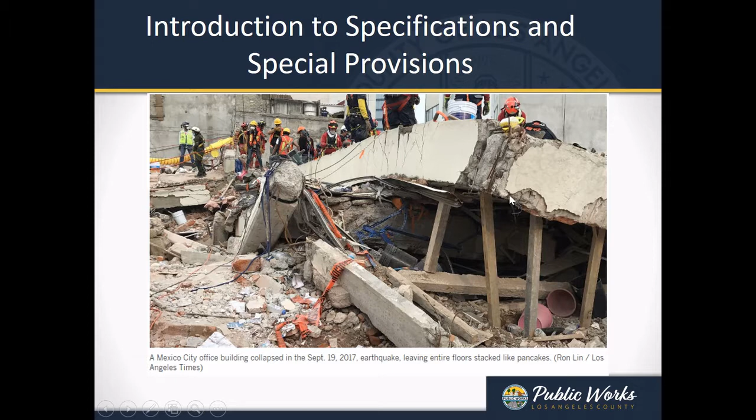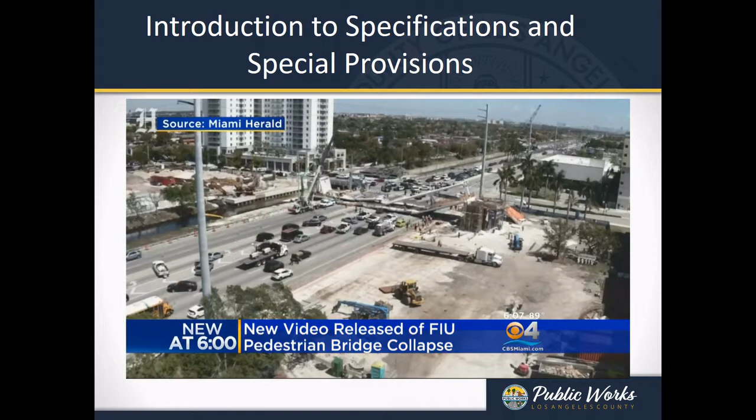All new at 6, we're getting a different, closer look at the FIU pedestrian bridge collapse that killed 6 people back in March. New video from FIU, courtesy of the Miami Herald, shows a time-lapse of the bridge from 3 different angles, composed of photos from different cameras around the university. At one point in the video, you see workers standing on top of the bridge before the collapse. The NTSB is still conducting their investigation into the cause of that collapse.

So 6 people were killed. Other people were injured. Many families' lives were shattered. And lawsuits were filed. I hope you noticed in the video that they had allowed traffic to go under the bridge while construction was going on. If they had had a specification that said close the road while you are working on the bridge, they would have saved some lives.

All new at 6, and we're getting a different, closer look at the FIU.

So let's take a look at the two basic types of construction specifications. The first one is method specifications, and the second is performance specifications. The Green Book is an example that uses method specifications, and Caltrans standard specifications uses performance specifications.

Method specifications are a lot like recipes. You follow the exact materials and steps. Performance specifications are concerned with the final product, and there is a lot of in-place testing.

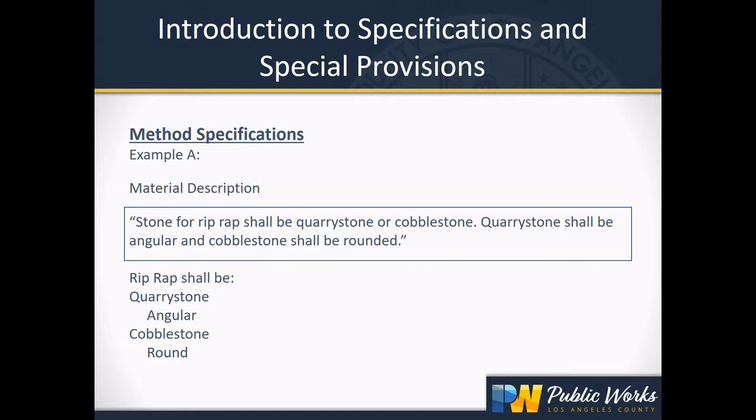So here's an example of a method description. The pavement shall be compacted with 3 passes of the roller.

So, performance specifications. They describe the required result and quality of the final product. They specify required performance of the materials, equipment, and completed construction. It gives the agency the ultimate decision to accept or reject the final product.

Here's an example. This basically says that they will perform a hydrostatic test. The leakage is not to exceed 0.6 gallons per inch. If it does, you stop the leak, fix it, and then repeat the test until the 0.6 gallon per inch is met.

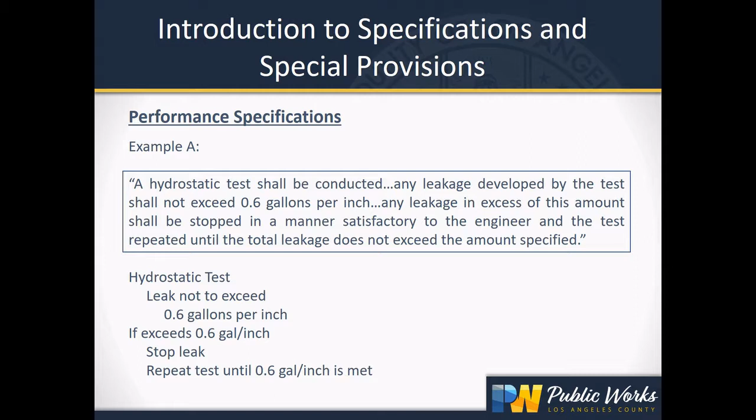Another example: the pavement shall have a strength of 300 psi.

So be careful. Do not mix method specifications with performance specifications, because it may lead to conflicts between them. Here's an example: the pavement shall be compacted by making 3 passes with the roller and shall have a strength of 300 psi. So if you make 3 passes with the roller, will it have a strength of 300 psi? It may not. So there's a conflict if that occurs.

Now we're going to go over the 2 typical basic specification formats. The first one is CSI, which is typically used for vertical construction, like in buildings, dams, electrical and mechanical work. The second one is AASHTO format, typically used for horizontal construction, like on your roadway projects and your underground conduit construction.

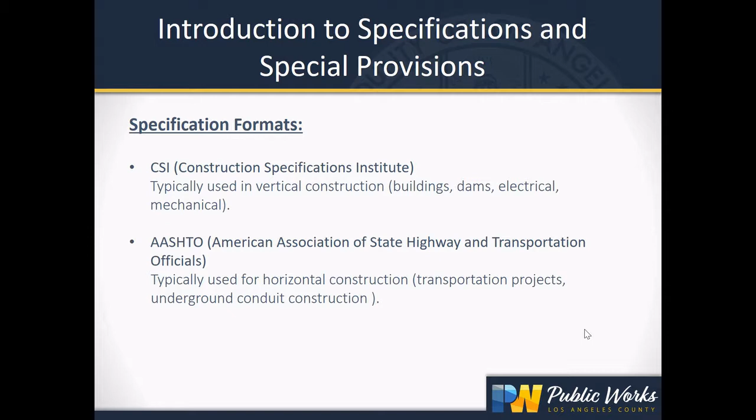So if you are submitting your specifications to construction, you need to know that construction administers specifications following the AASHTO format. CSI format may be acceptable for specialized sections not covered in the Green Book. It also includes a standard specification and a special provision. The standard specification is the standard specifications for public works construction, also known as the Green Book.

A standard specification is basically a published book that contains the basic requirements for general contract provisions, contains the basic technical specifications for common types of construction, and is commonly used by many public agencies.

So an example, using our cookbook example: let's say our chef wants to find a basic recipe for chicken broth. So his standard specification would be a basic cookbook that has a recipe for chicken broth that could be used for a variety of dishes.

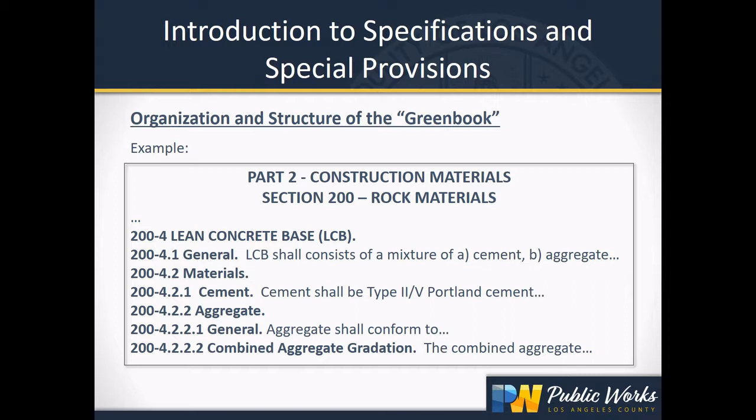So the first section we're going to cover is Section G. Because Section G is required for all contract projects, Section G supplements and amends Part 1 and Section 400 and 402 of the 2018 Green Book.

Part 1 covers all the business aspects of a project, which are the legal and contractual requirements of the contract. Section 400 and 402 are in Part 4 of the Green Book, and that covers existing improvements.

Section 400 goes over protection or restoration. Section 402 goes over the existing utilities. And Construction Division is responsible for preparing and stamping the Section G.

Okay, so Section G - since Construction Division is responsible for it, I'm going to take this time to go over the information in Section G in Part 1 that is relevant to the designers or is just good information to know.

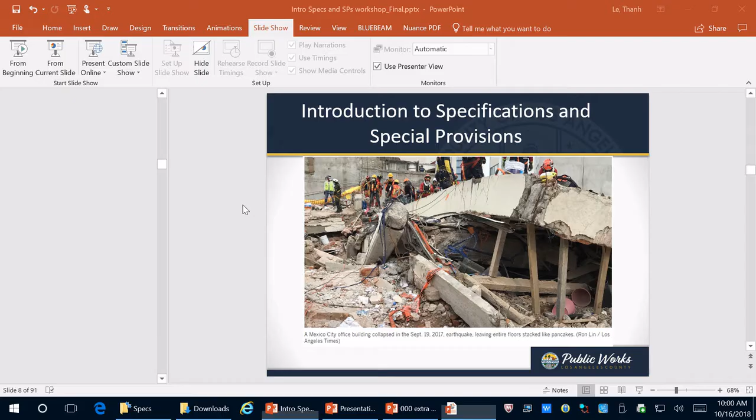So other defined terms are engineer, contractor, plans, special provisions, shop drawings. So engineer is a very important term.

We don't want to use inspector. We don't want to use field engineer. The term is engineer, and this refers to the office engineer.

He or she is the main point of contact between the field and our office personnel. So he will get all the submittals, all the RFIs from the field. He will either answer the questions, answer the submittal, or refer it to the appropriate person.

So also in Section 1 is a list of abbreviations used in the Green Book. Make sure you check what those abbreviations are, because you might be using some of them in your plans and they might have a different meaning in the Green Book.

So if that happens, then you want to redefine that definition, that abbreviation in your plan. An example is like AC. In the Green Book, it means alternating current. And then in the plans, we usually want it to mean asphalt concrete.

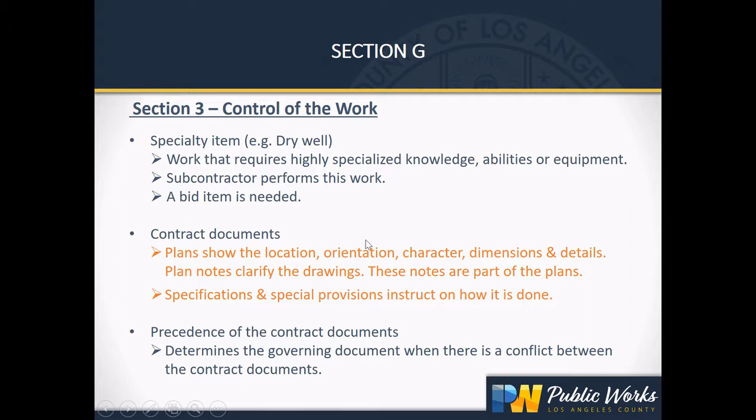Submittals are very important. The designer provides input on what submittals are required and which need a stamp and signature, and should consider who will review the submittal and of what value it is. The submittal must be accepted by the engineer before any material delivery, fabrication, or work can be done, so there's no need to state that in your special provision or plans.

Working drawings and shop drawings are defined terms in the Green Book, so we must use and adhere to the definition. Working drawings are the detailed drawings not on the plans, used by the contractor in the field. An example is shoring plans - it's not in our plans, but the contractor needs plans to build from, so he creates working drawings for shoring.

Shop drawings are the detailed drawings of the products. These drawings are used by the manufacturer in the shop. An example is signs. Shop drawings are submitted to the designer, who has to approve the way it looks, and it goes back to the manufacturer, and then they produce it.

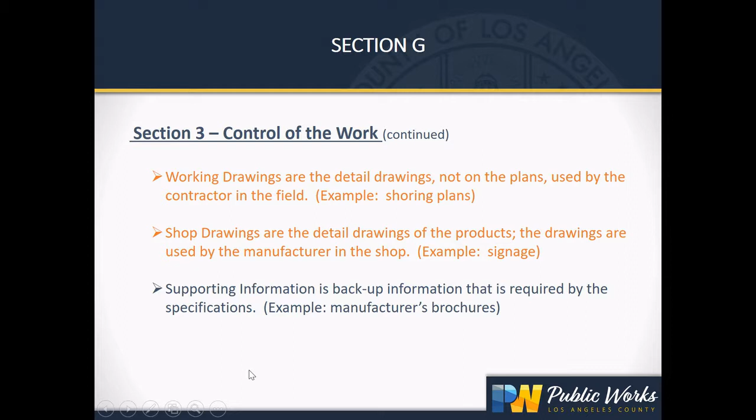Another subsection in section 3 is water pollution, and only one of these is used in our plans, not both. Best management practices are used when a project disturbs less than 1 acre. Stormwater pollution prevention plan is used when the project disturbs more than 1 acre. Disturbs means that you are exposing the subgrade or base for more than 1 acre.

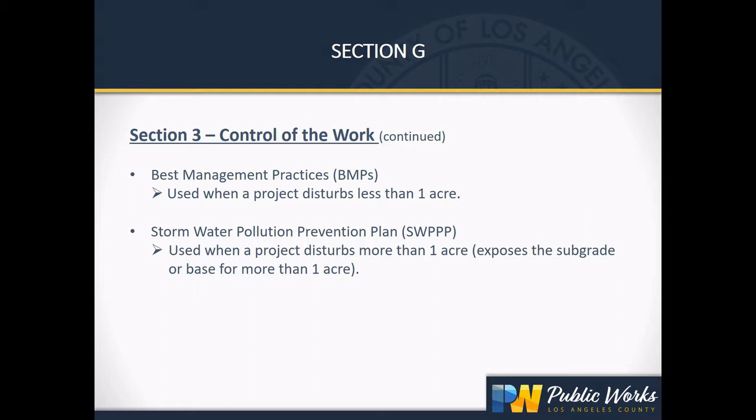Section 4. There are clauses in here that state that all items furnished by the contractor are new and free of defect. There's no need to put 'new' on our plans.

The contractor may offer an equivalent to the products listed in the special provisions and submit it for review. So if you have products listed, even if there's 3 and you don't say 'or equal,' this section says the contractor can still submit an equal for review. The only time he cannot submit an equal is when they have a sole source product, and sole source products or materials need to be disclosed in the specs, with the reason justified.

Section 5 covers topics like labor for hiring goals, insurance like general liability insurance, and safety like worksite safety.

Section 6 includes information on construction schedule. The designer should, in the design phase, discuss with construction the schedule, including the construction field staff and T&L, and discuss how to build the project - what are the constraints, and what is the required sequence of work.

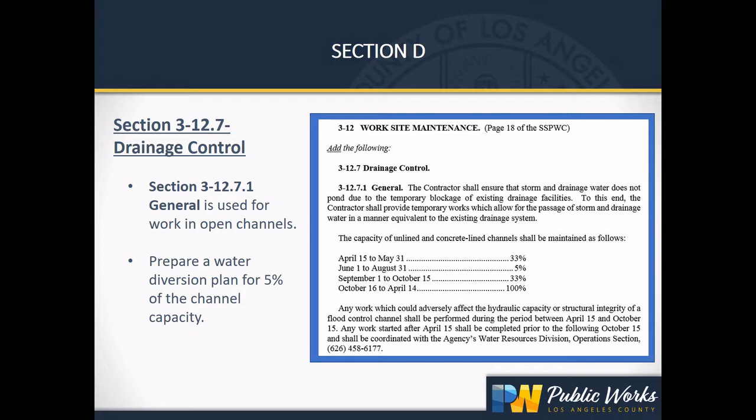Okay, first of all, we start with drainage control. The first part, the general part, you put this in your specs if you're doing work in an open channel. And if you are working in a channel, you want to prepare a water diversion plan for 5% of the channel capacity. You can see on our table that the June through August time is 5%, so that's when we will assume construction is happening when you're dealing with an open channel.

The second part, the damage from elements and control of water, we use this for all of the drainage projects, the channels and the storm drains. And you have a nice blue box there. In there you put the capacity, that's the design capacity of the existing system that you're either going to be tying to or that you're messing with.

If you're working in an open channel, you put it in exactly the way it's written here in the template. You're going to put in your capacity, provide a diversion plan at the end of Section D, and have that bid item at the end.

If you're working in a storm drain, the contractor still has to control the water, but it's usually such a small amount it's considered tiny, negligible. So if you're working in a drain, you do not have to provide a diversion plan, and you do not need a separate bid item. Payment is just considered as included in the various items of work.

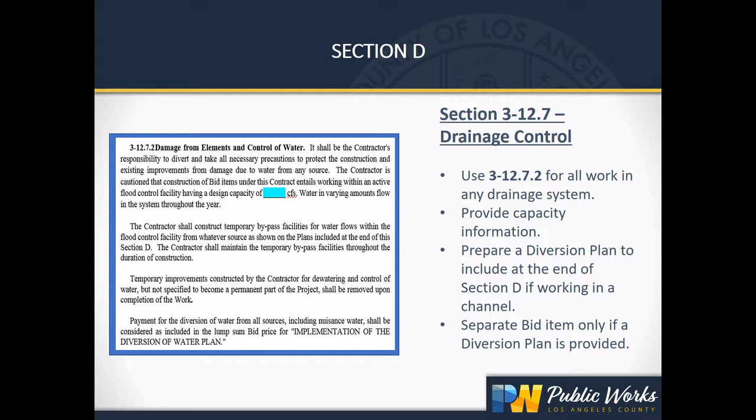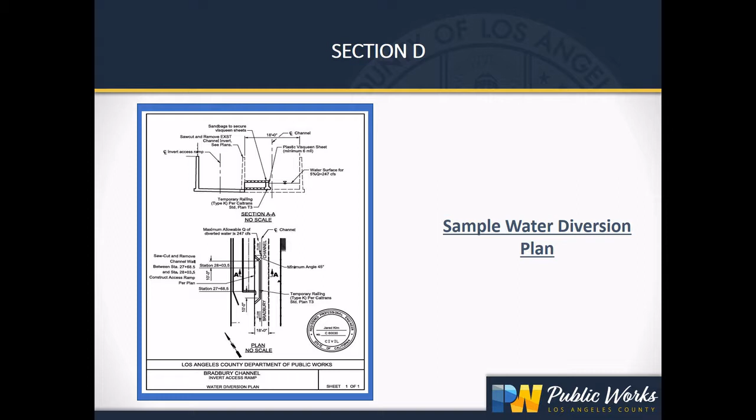The one thing about this section is if you are doing work with the structural section and there is enough to where the structural people are actually preparing a Section S, then you do not want to put this information in your Section D. If that is the case, just refer to Section S. Make sure you don't repeat this information.

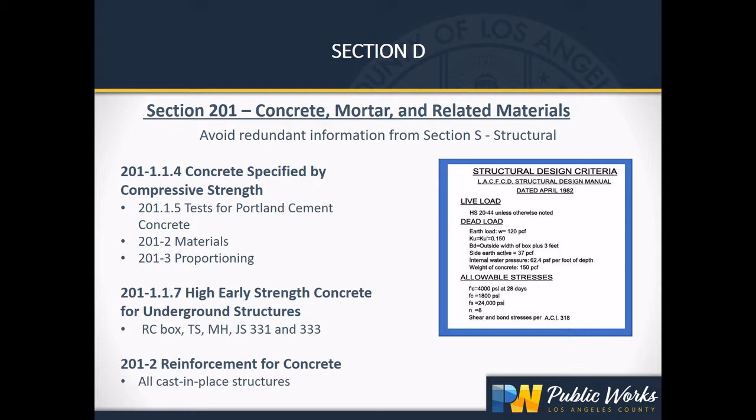Section 207 is for reinforced concrete pipe, so if your project involves reinforced concrete pipe, include the entire section except for these two. That general section, highlighted in yellow, when they talk about high velocity, that's velocity over 20 feet per second. A debris carrying system, that's if you're putting a drain, say, immediately downstream of a debris basin, or if you're in a sediment placement site. Special exposure would be like if you're by the ocean, or if you are dealing with some kind of contaminated material.

The hydrostatic pressure test, you only have to include this if you are using a watertight system. Most of our storm drains are not going to be watertight systems. You only need watertight if you're dealing with high groundwater or if you have soil contamination.

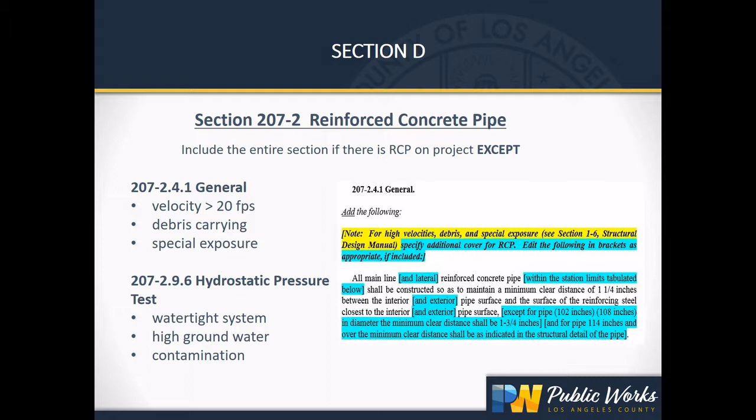The bedding and backfill, you have to include this for all pipes. Under the bedding material, there's 3 paragraphs: one says the excavated material can be used for bedding, one says it cannot be used, and one says it can be used in certain locations. This is taken straight out of the GMED report, so you pick one of those paragraphs, whichever one is applicable to your project. Same for backfill. GMED will tell you if there's anything regarding high moisture content. If it says nothing in the GMED reports, keep that part out, just delete it.

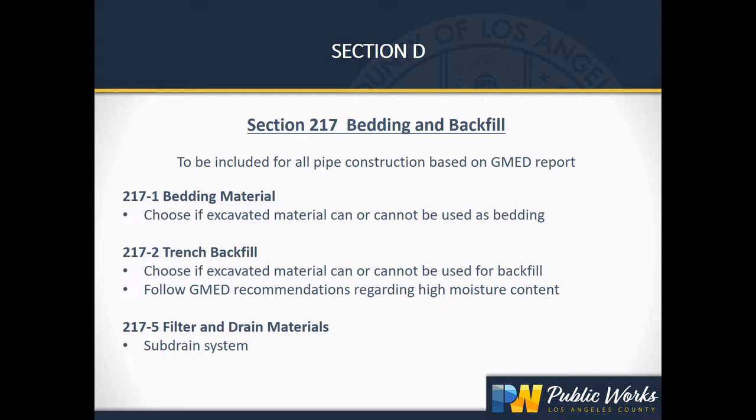The filter and drain materials, you include that if you have a sub-drain system. If you don't, just leave it out.

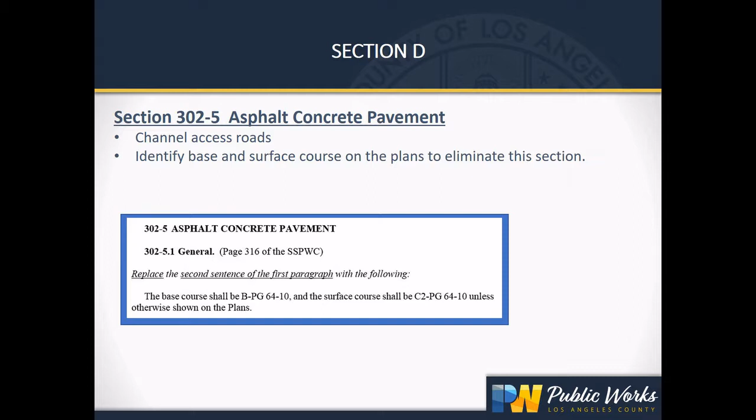The next one is for asphalt concrete pavement. For drainage projects, this is probably just going to be like a channel access road or maybe an access road in a spreading ground. That part you see there is the entire section. So if you include on your plans what the base course and surface course is, you can just eliminate this from your specs altogether. So I think we should try to get in the practice of calling this out on our plans.

This section 303, this is also for cast-in-place concrete structures. This is another one, like I said before, avoid redundancy with section S if there is a section S. If there's a structure section, then just say refer to section S.

If you have any cast-in-place structures, include the entire section except for the removal of forms for cast-in-place reinforced concrete box. That's obviously only for a reinforced concrete box. If you don't have any box, leave that out.

You have a whole general section that has pay items in there. You need to read through that, and read through each paragraph and edit it for what's relevant to your project. It talks about payment for modifying standard plans and for local depressions. If your project does not involve any of this, scratch out those paragraphs that are not applicable to your job.

If you have special structures, like say an invert access ramp or an outlet structure, you have to include a payment clause for it. And the payment clauses start right there at 303-1.12.2. You say payment for whatever, and then you say what it covers.

And then 303-2 is for air-placed concrete. That is for gunite or shotcrete. Make sure that if you have that, you use the proper terminology. Call it air-placed concrete. Do not call it gunite or shotcrete.

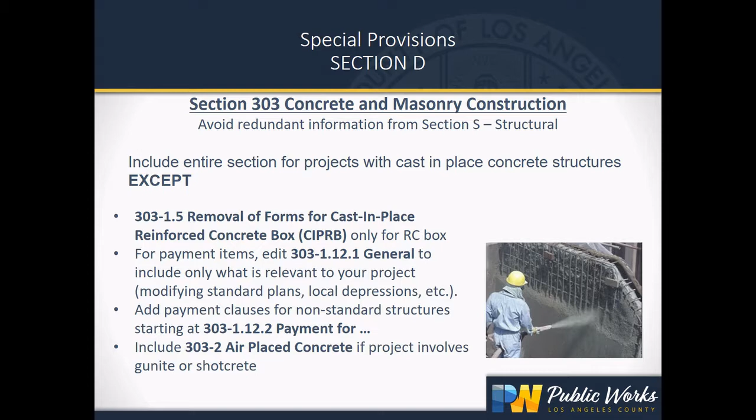This metal fabrication section relates to flap gates, and there's a picture if you don't know what a flap gate is. This is a flap gate on the left, and on the right is a protection barrier for storm drains. If your project involves this, include it. If it doesn't, just leave it out.

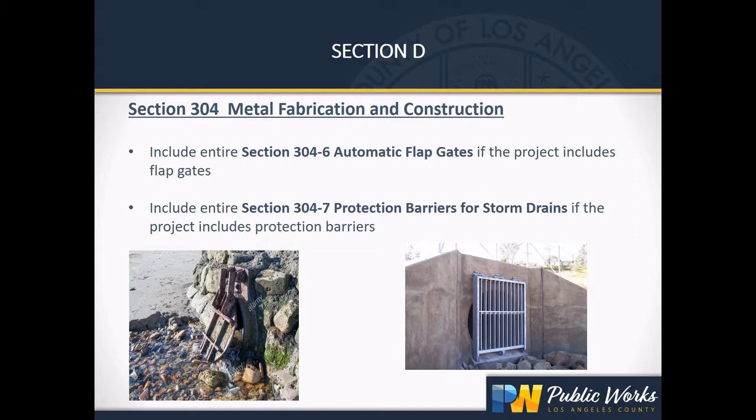Section 306 is the biggest and most complicated section, so I'll go through each of those subsections as we go along. So the first one is removal of surface improvements.

This talks about sewer or water line construction, but if you have a project where you're reconstructing sewer house connections, you need to include this in there. If you don't, leave it out.

The removal and abandonment of existing conduits and structures talks about if you're removing existing drains and you want to salvage the manholes and the manhole frames and covers. So again, if you have that on your job, put it in there. If you don't, take it out.

The maximum length of open trench relates to construction in the roadway only. If you're running a trench through a park, leave this out. It's only in the roadway.

And then remodeling existing sewer facilities only if that's applicable to your project. If you're not remodeling sewers, then just leave it out.

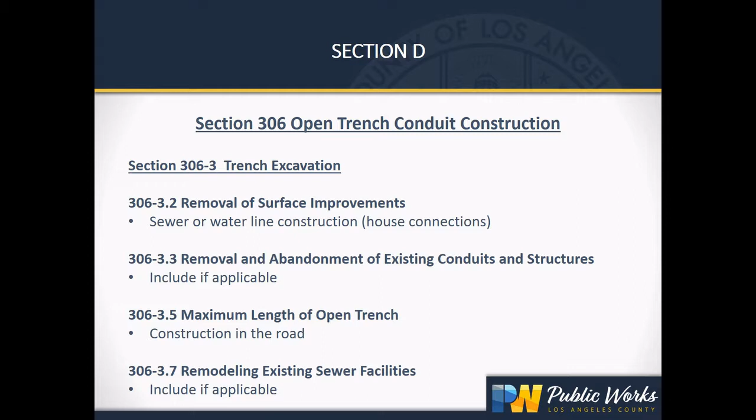The next one is shoring and bracing. This is for any project that involves shoring. And basically, if your excavation is 5 feet or more, you're going to need shoring.

This section should be checked over by GMED. A lot of times you get the GMED report and all it will say is KW equals or the soil was classified as something, just two sentences. If that happens, you need to send it back to GMED because there's a lot of things in this section that don't apply to every single project. They're the ones that need to go through this entire section and edit it properly so that you could just include it verbatim.

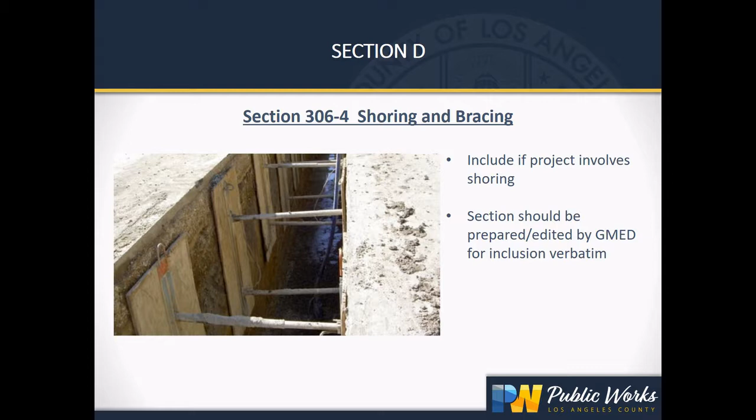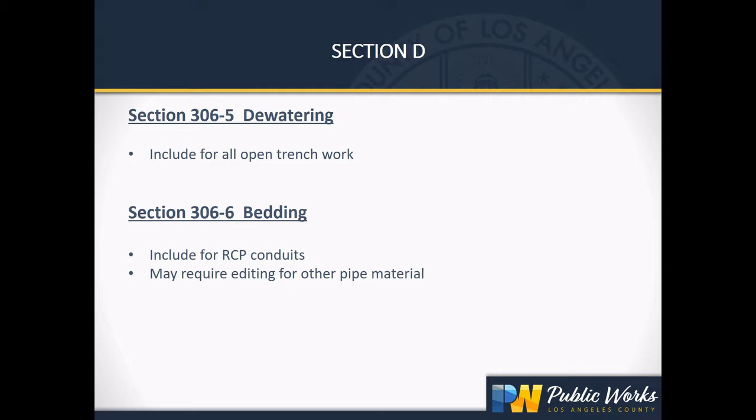The dewatering section, that's just standard. We put it in for all open trench work. The bedding section is written for reinforced concrete pipe. If you're using a different type of pipe material, you're going to want to read through this. You may have to edit it, and you're probably going to have to put some more details on your plans.

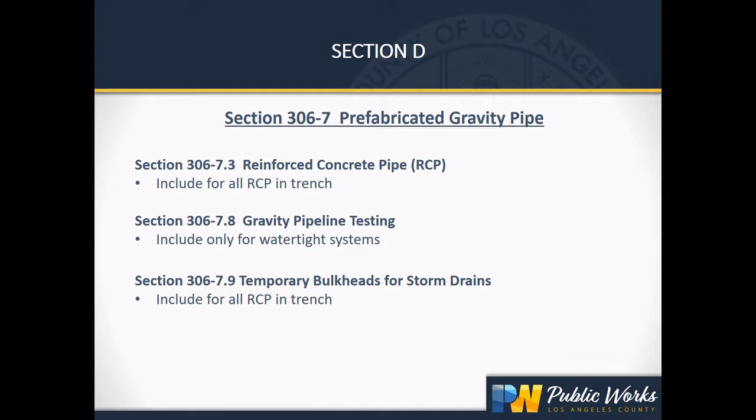The gravity pipe section is again written for reinforced concrete pipe. If you have reinforced concrete pipe, include section 7.3 for the whole section. You only need pipeline testing if you have a watertight system, which is only if you're dealing with high groundwater or contamination. And the temporary bulkheads, that's standard. We put it in for all reinforced concrete in a trench.

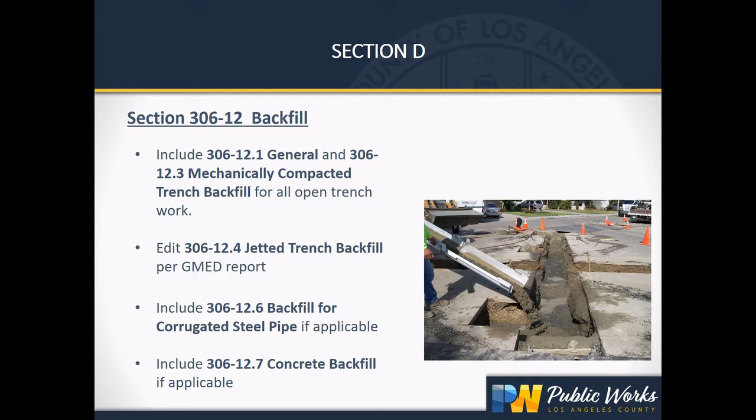Trench resurfacing is only for open trench in a roadway. If you're trenching through a park, you don't have trench resurfacing. The measurement portion talks about catch basin connector pipes. If you don't have catch basin connector pipes, just leave this part out.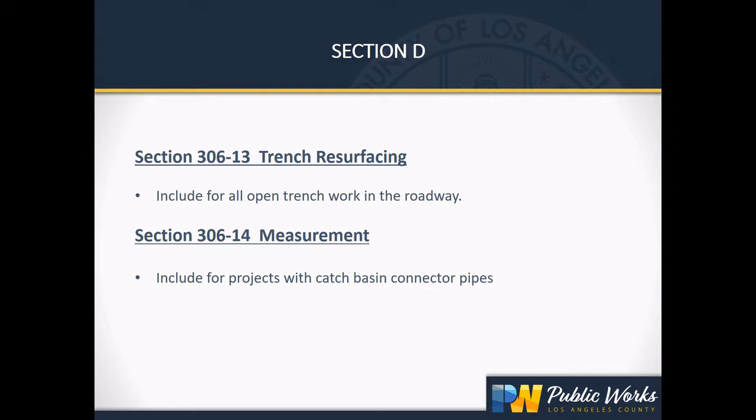The 306.15, that is the payment clause, and this is the payment for the conduit in place. It's a big, long list of stuff that's covered in the payment. You need to look through each one of these items, make sure it's applicable to yours, or if there's anything else you need to add. One thing to remember: shoring and bracing is always a separate bid item. Don't ever include it in the price of your conduit. There are other subsections under here that you include if applicable, such as pipe inlets, resurfacing, and sewer house connections.

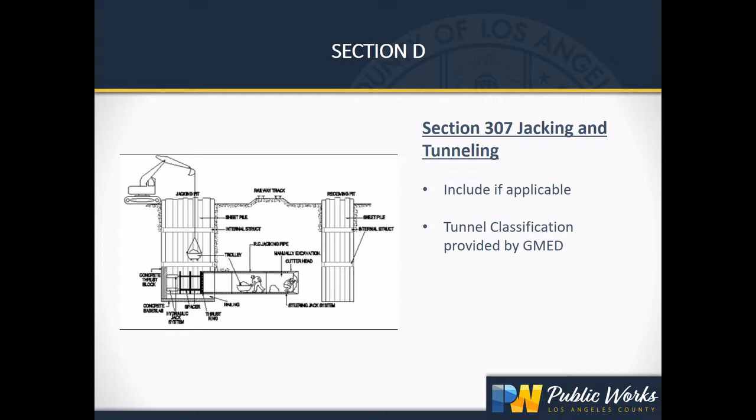Section 307 covers jacking and tunneling. For those who don't know what that is, that's when you install a pipe without opening a trench. You basically open two pits and push it. You use this when you're very, very deep, or if you're going over something you can't open, like going under a railroad. The tunnel classification is provided by GMED, and if you have this on your job, include it. If you don't, you can leave it out.

A sub-drainage system is just a small perforated pipe, used to control the groundwater to protect your structures. If your project has this, then you include this entire section. If it doesn't, just leave it out.

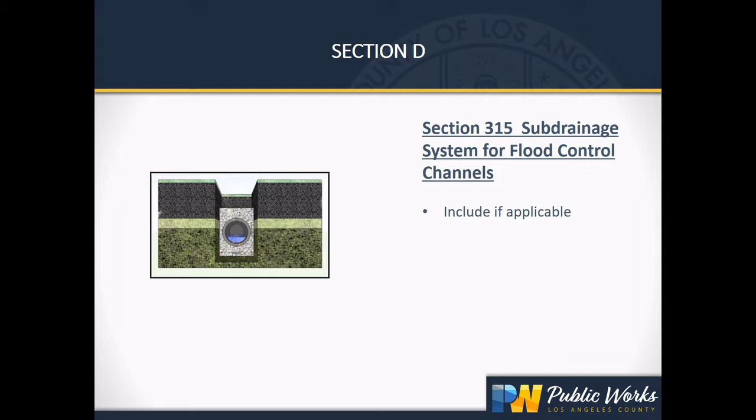For restoration, we have a bunch of stuff written in the template for protecting and restoring things like mailboxes, fences, and lawns. You have to read through every one of those paragraphs and include only what's applicable to your project. If your project does not involve it, just delete it. One thing to be careful of: if you're working with landscape architects and removing a whole bunch of stuff, but they're coming back in with a whole new landscaping plan, then you're not restoring. So you don't want any conflicting information. Work closely with your landscape architects to identify what really needs to be restored or what's going to be brand new.

And that's the end of my section D.

Okay, section R. Section R supplements and amends parts 2 and 3 of the Green Book. Section R covers the special provisions for materials and methods for work between the roadway subgrade and the pavement finished surface. Design Division will eventually be responsible for preparing and stamping Section R.

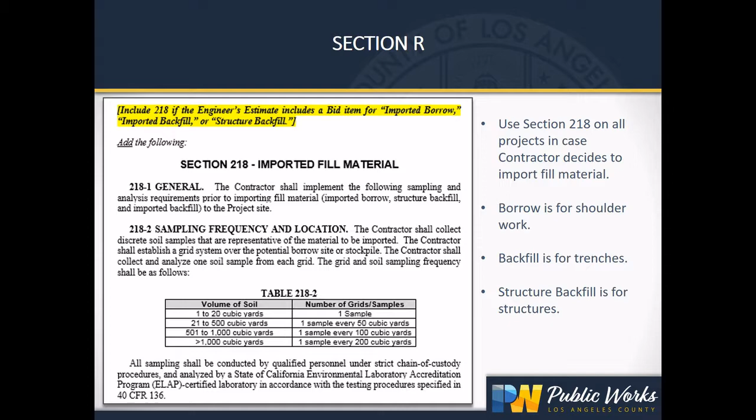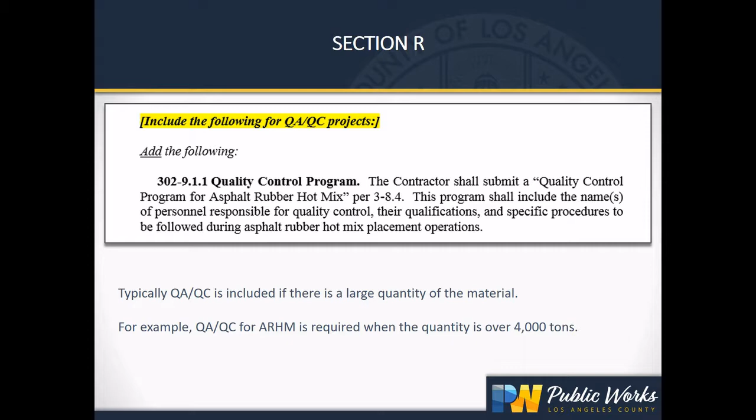Sometimes you're going to be asked to include a section for QA, QC. So how do you know if you're going to include it? Typically, QA, QC is included when there's a large quantity of material. For example, ARHM is required when the quantity is over 4,000 tons. You can also consult with Construction Division if they want to include it.

Sometimes you might have to choose between whether the agency or the contractor will do the work. Typically the agency will be performing the work, but you want to confirm with GMED or Construction.

Just-in-time training is used for a couple of our work items and is generally required for large quantity items, so on this you want to consult with Construction before including it in your special provisions.

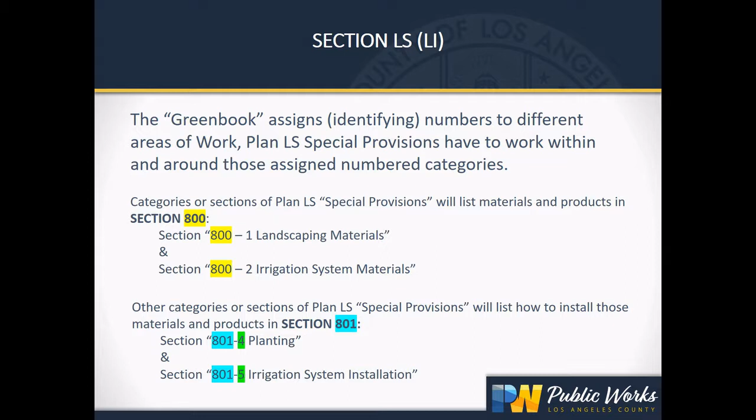This template that we work with for the special provisions also includes other portions, which are the 801-6 maintenance and plant establishment. That's what we want to do to get it up and running and make sure it's all working right. Measurement, but the most important here is payment. And payment is going back to the engineer's estimate. It's going to list under this section what items we're talking about and what units being used to pay them.

So here's an example. These were items that were added to the Green Book in our special provisions. Our special provisions then list some item in here. And if we find in here, Class A topsoil is paid by cubic yards, so our engineer's estimate would have said pay for topsoil in cubic yards. No, it would have been whatever it says here. Oh, it says cubic yards. If it had said square foot, then you'd have a problem. So you just have to link those things together.

And then at the bottom here, I have agronomic soil report, and that was for the payment of each. So like I said before, that's something that gives us help during construction. So the main takeaway here is match the unit.

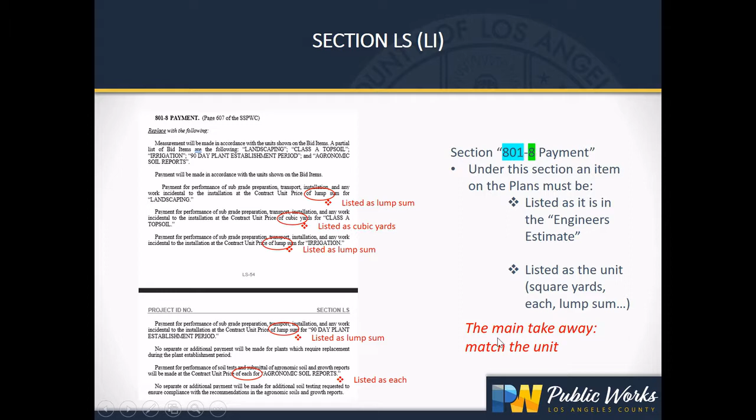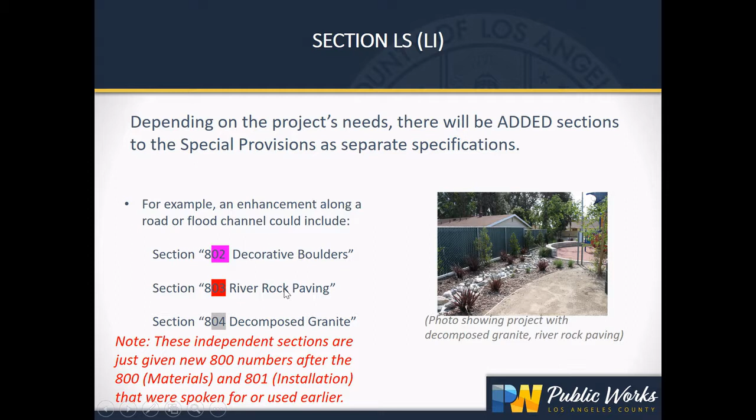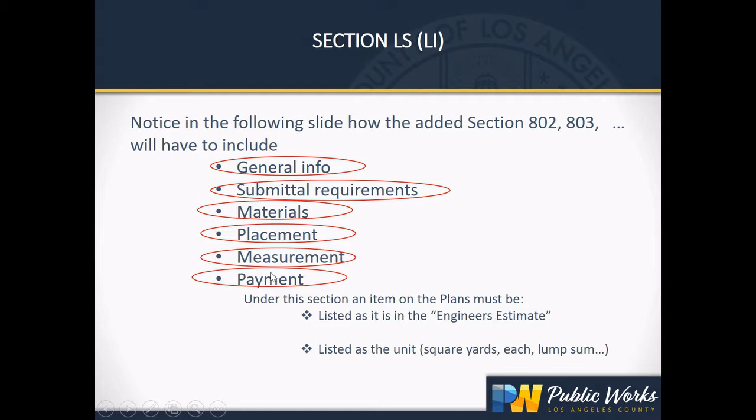Right here, this is a photo of an improvement. You can think of this as a park-like scenario, or along a channel. And we're creating some kind of opportunity for people to collect. In a designer's mind, they have river rock placed in here, and then maybe some kind of decomposed granite and a heading. Those will each need their own spec. And what they'll do is break it down under general information, the submittal requirements, the materials, the placement, measurement, and again, the reason we're here, about payment. So it all lines up.

So this is an example of that river rock cobble. It's saying what it's called. I don't think it's supposed to be capitalized, is it? That's not supposed to be capitalized, so that's not a defined term. But the rest of this is correct in that it'll say what the submittal requirements are.

It's going to give them 3 alternatives for my materials. Now, you may have that in the way you create your specs, having to have 3 alternatives that they can pick from, not 'or equal.' You're saying it's this, this, and this. And then how it's to be installed.

And at the last part down here, it says the contractor will be paid the contract unit price of square foot for rock cobble. And that was my brief overview.

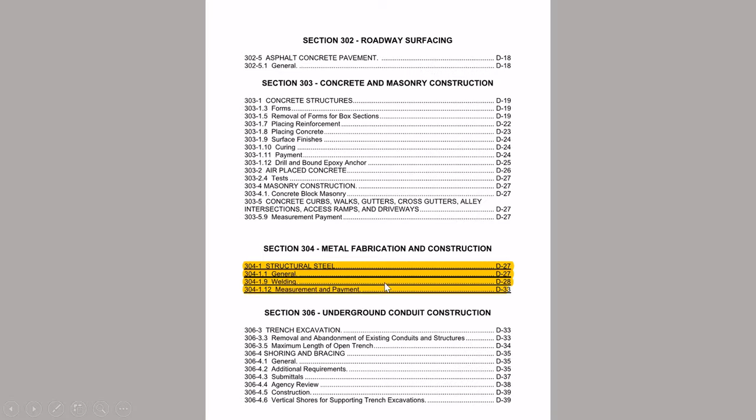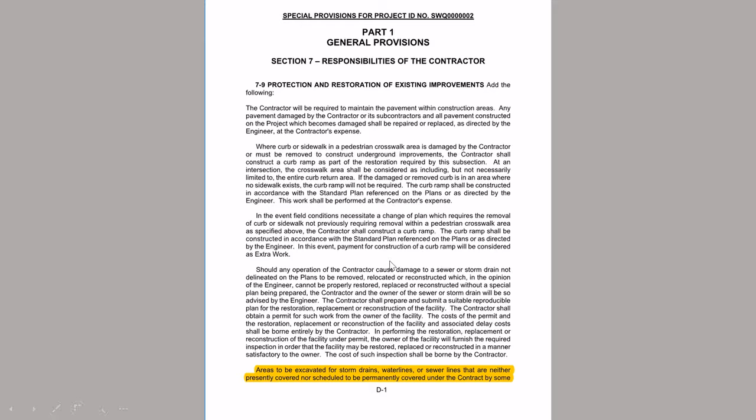Here at the bottom he says 'add the following' — what you want to do there is just move it to the next page. On this page, you have one little word at the top. So on the page before it, you want to play with the spacing and get that one word back to the previous page.

At the bottom here, you have a list that is truncated — the rest of it's on the next page. So again, play with the spacing on the previous page and get those two items back in, or take this whole section on products and move it to the next page.

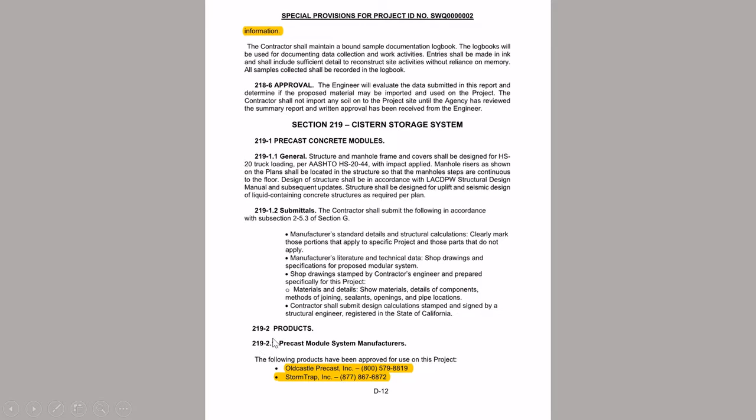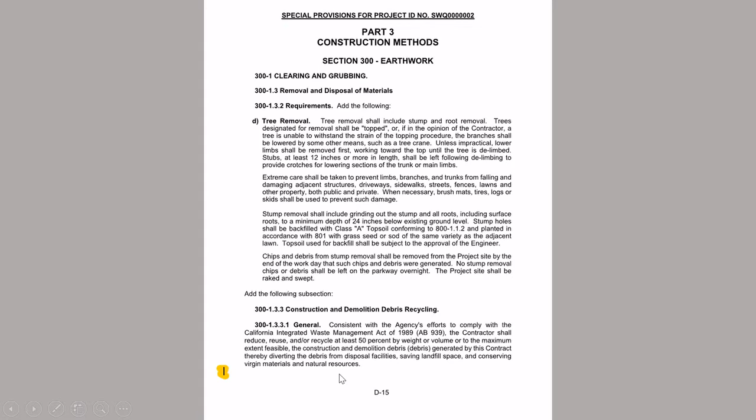Here we see some tracking marks, so you need to be careful of those. More tracking marks. Here, 'add the following subsections' and you just have the title for that subsection — move it to the next page.

So some of you that have not done special provisions before might be worried about how you're going to be a proficient spec writer. Here's the key to learning it and being proficient. Everybody knows who John Wooden is, UCLA's winningest coach in basketball. He came up with four laws of learning.

Step number one, explanation—that's what we've done for you today. Number two, demonstration—we've demonstrated through some examples. You also have examples in the Green Book and in the Special Provisions templates. Now we're all going to imitate that. And finally, repetition, repetition, repetition. And you will all become proficient at special provisions writing.

So I hope you all learned quite a bit. I want to go back to something I said previously about the expectations. The associate civil engineers are writing the specs, and the civil engineers are going to be reviewing the specs. That part remains true. What I didn't mean to do was leave out some of our other classifications and writers—we have design divisions comprised of architecture, landscape architecture, mechanical, and electrical engineers. I know those sections are smaller units and don't meet the same titles, so I'll let them figure out how they want to proceed with their writing and review process.